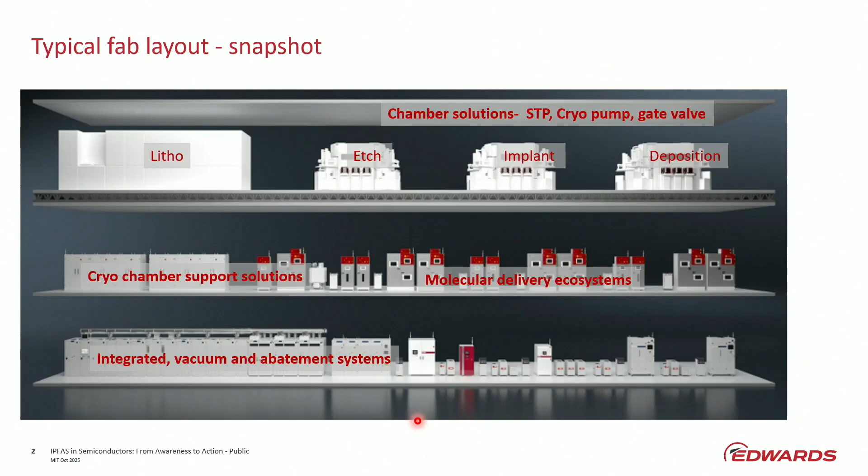Edwards, as you've just described very well, sits in the fab in various places, from the clean room with our turbomolecular pumps and chillers, to down in the sub-fab with our pumps and our abatement, but enough of the sales pitch. So what are we going to do today? I'll spend a bit of time on awareness. That's my role in life.

What are PFAS? This is very much aimed at a general audience. So none of what's going to be discussed here is technically challenging and won't go into substantial depth, but it is relatively broad ranging. So what are PFAS? Key environmental parameters and health impacts. Some of the regulatory frameworks. I was just being asked what's going to be the driver. Is it going to be public outcry or regulator? And the answer to that one, well, depends where you are.

The industry response. The industry often tries to get ahead of things by doing things voluntarily before activities are imposed on it. And how that industry response has actually been manifested in some health data. Then analysis. I'll briefly touch on analysis. The conclusion to the analytical section is basically you can't do all the PFAS with any one technique. There's a lot of work to be done on analysis and waste treatment. The two are intimately tied because if you can't measure something, you can't work out whether you're actually successfully treating it.

Then the studies on our own sites, water and wastewater. Some abatement characteristics. We've been looking at passing PFCs through our abatement. We've been looking to try to mimic chambers and passing byproducts from chambers into our abatement. And then some deposits that we found on pumps that have been returned to us from fabs themselves. So these are deposits from essentially real high volume manufacturing situations.

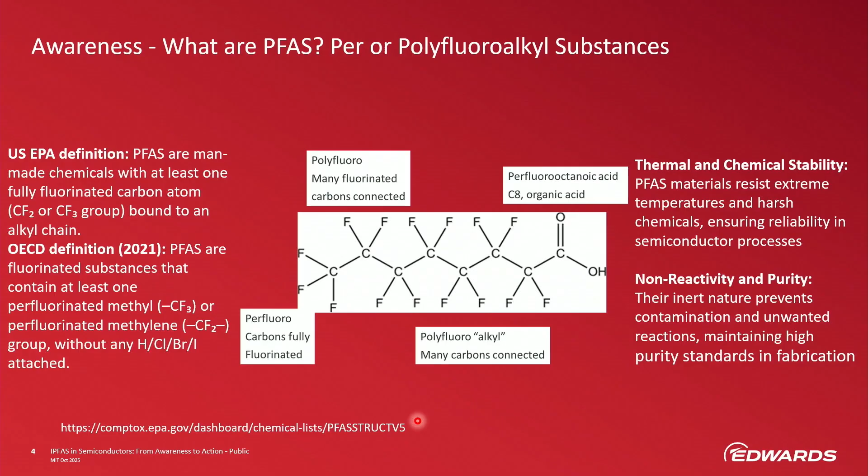As far as the fab is concerned, these are used in photolithography and photoresists, in etch and deposition processes. It depends how broad you want to go on what's a PFAS and what isn't, but in etch and deposition processes, some of the gases used may not be classified as PFAS. In equipment components, I've already mentioned PTFE, PVDF, PFA, Viton, Kalrez, materials like that. Heat transfer fluids: many of the heat transfer fluids are PFAS and need to be PFAS in order to keep the chillers the size that they are. We're moving over, because of various regulations, to different materials, different gases, but they can often represent different challenges.

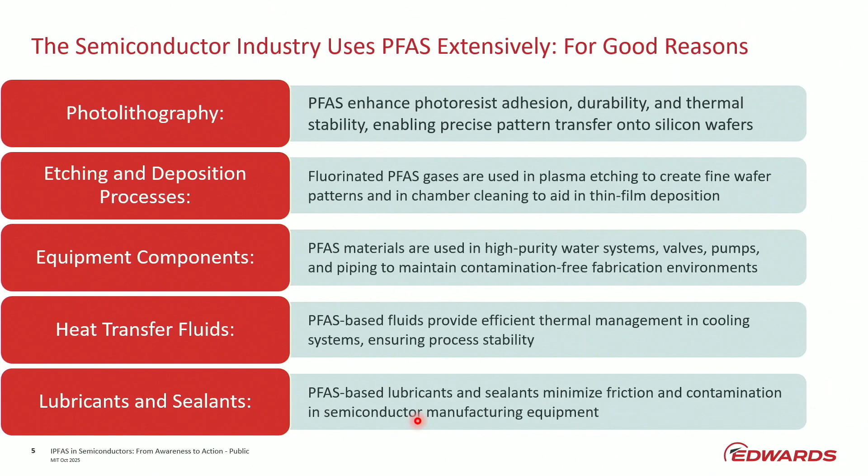And then lubricants and sealants. Our own pumps contain a perfluoroether, and certainly we use sealants that are PFAS at the moment, but we use them primarily because of the aggressive environment in which we're operating. Various parameters that are used to study the impact in the environment include things like persistence in water, persistence in the body, whether it's mobile, whether it is toxic, whether it's bioaccumulative.

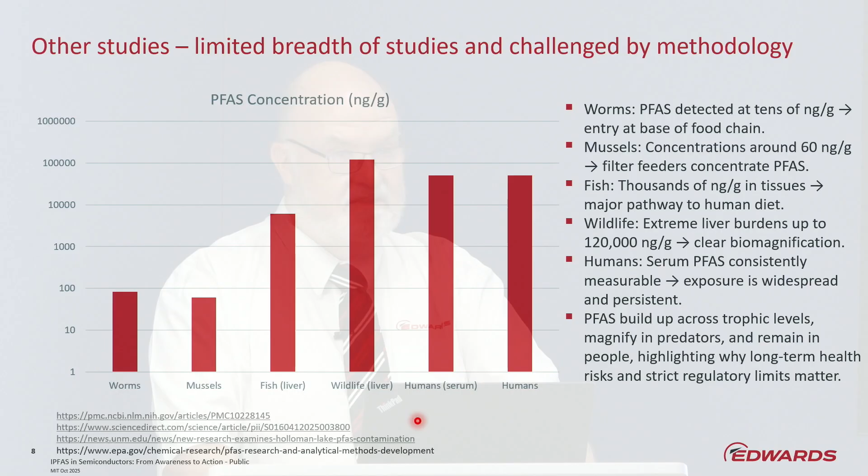So one example of bioaccumulation. If a material ends up in a plant and then moves into an animal, and that animal is eaten by another animal, and the PFAS is accumulated through that chain, that's called biomagnification. This is just another study: from worms to mussels, various wildlife, different organs. Protein-rich organs, so the brain, the liver, etc., tend to be areas where some PFAS will concentrate. I'm going to come back to the human serum comment in a little while. It's a good measure; there have been lots of studies on how that has changed over the years. The importance here is that predators will generally be eating species that are themselves contaminated, and it's a different route to mobility.

The effects. What I would stress here is, although this is a relatively large set of studies, and the greater list of references is rather more extensive, this is still a relatively small number. This work is ongoing, it's very early, and the analytical challenges that I'll probably come on to occur throughout all of these types of studies. Immune suppression, endocrine problems, liver challenges, thyroid and reproductive issues have been studied. They are of statistical significance within the study, but how do you then try to correlate with the presence of PFAS if the analysis of PFAS is still at a relatively early stage?

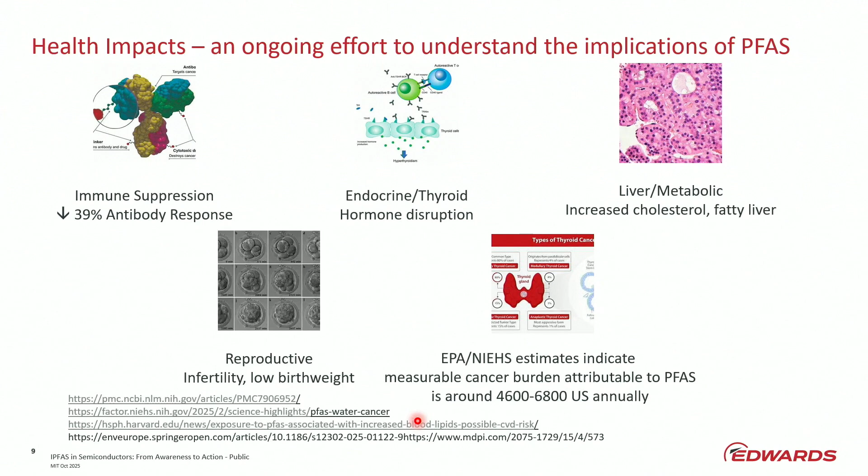So we all drink drinking water. So as this narrows, we're beginning to focus now on high-risk PFAS. And certainly the risk assessments, the methodologies used, are going to become increasingly important as we move forward. It's all about really what matters, but I'm not entirely sure that we're well versed in what matters yet.

Key considerations for the policymakers. I've mentioned persistence, bioaccumulation, toxicity, and mobility, etc. What scope are we going to use? Europe's got its 5,000. If they change to the revised OECD limit, then that will go up several orders of magnitude. US EPA currently 15,000, 20,000. The regulatory frameworks really do vary around the world, and that's a bit of a problem. There needs to be a significant degree of harmonisation. Stockholm Convention helps, but the Stockholm Convention is usually where things end up relatively gradually rather than broader policy.

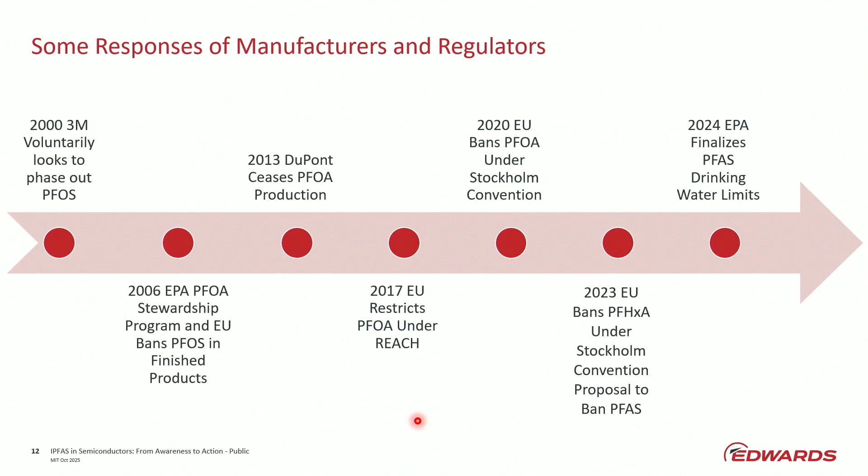And there's certainly a recommendation from the various medical institutions with regards to what you do and what levels are the action points. At less than 2 nanograms per mil, now you'll notice I've suddenly jumped to nanograms per mil, I'm going to be talking about nanograms per litre in a while, no action is needed. Follow standard healthcare rules. 2 to 20, we ought to be looking where they're getting exposed, and that's especially true if we're talking about pregnant ladies. And at greater than 20, there's really urgent action needed. We should be looking for signs and symptoms of problems in the thyroid, in the kidneys, testicular cancer, colitis, etc.

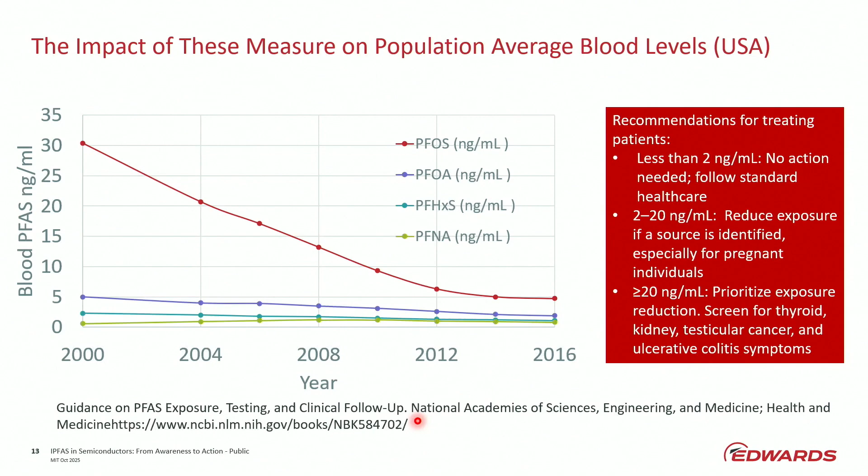Should I be concerned? I've certainly attended quite a few conferences recently where it seems to be very in vogue to send your blood off for PFAS analysis, and folks will present it. Is it a good thing? I think awareness is a good thing. If it's just fashion, I suspect that's not the case.

On the analysis side, I mentioned US EPA method 1633. LC tandem mass spec. It's certainly the method we've been using, not 1633. We've been essentially looking at a derived version of the older 537 with a rather broader range of standards, but nonetheless, that's certainly the method we've been using for our wastewater.

Air and volatiles, OTM 45 and 50, derived essentially from semi-volatile methods. Blindingly expensive to get done. Would love to get it done within the projects that I tend to be active in, rather more difficult to justify. Total oxidizable precursors, and then the various other methods mentioned here.

A good reference for review. I've listed most of the references, and the slide deck will be available afterwards for folks. So a nice review. It also then follows through to various other reviews. But the bottom line is 40, 50, 60 standards are on 1633, 5,000, 10,000 different species, 200 within TRI. There are some big gaps.

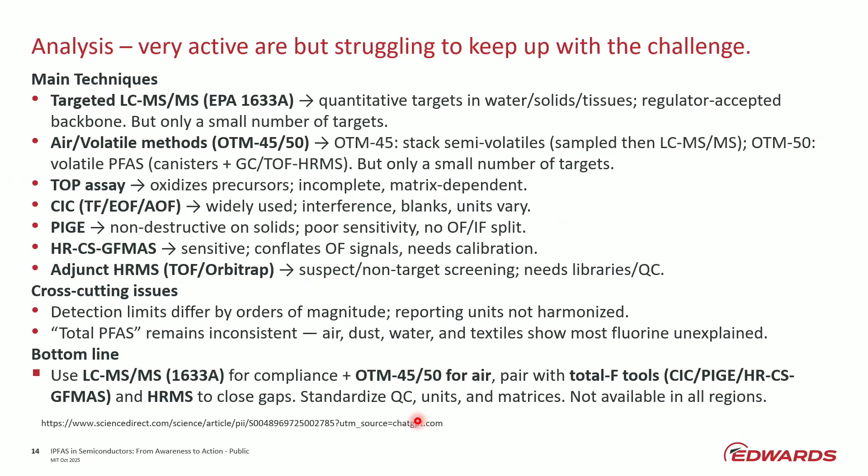In waste treatment, generally speaking, the gold standard seems to be treated as hazardous waste. So high temperature incineration, whether it's 1100, 1200 or longer term train type methodologies, you gradually increase the temperature of the material. At the moment, high temperature incineration seems to be the accepted method relatively globally.

In wastewater, granular activated carbon, ion exchange, reverse osmosis, all methods that are used, but as soon as you start getting very large volumes, you're going to start accruing substantial costs. A way of treating is supercritical water oxidation, familiarity with this from 25 years ago when it was proposed and used for chemical weapons treatment. They had challenges with regards to corrosion of their vessels. They also had scaling challenges. Neutralization in SCWO was highly effective, but it certainly had its barriers before it became implemented.

Electrochemical oxidation, as an electrochemist, I worry about this because it's surface area driven, it's diffusion driven. Can you get down to very low levels? That worries me. I've studied electro-oxidation for various contaminants quite a few years ago, and it can be effective, but can you get down to a nanogram per litre? Probably not without adsorption concentration technologies.

Liquid chemical concentrates, basically off-site hazardous combustion. We're back to combustion. Can you absorb and combust? On the gas side of things, thermal oxidizers at the right temperature. Well, I'm hoping I'm going to demonstrate that's probably the case today. The challenges are verifying the DRE, and certainly the data I'm going to show you today will demonstrate that we've certainly had difficulties maintaining any sort of carbon-fluorine mass balance.

So moving forward, the capture technology then needs to treat, you're always going to get secondary wastes. How do you treat your secondary wastes? So if residuals are there, do they get destroyed there? Do they get managed somewhere else? Combustion, okay. Landfill is accepted, but there are lots and lots of caveats with regards to landfill. How do you ensure there aren't any leachates? If there are leachates, how do you manage them? If there's off-gases, how do you manage them? We're back to the secondary waste challenge.

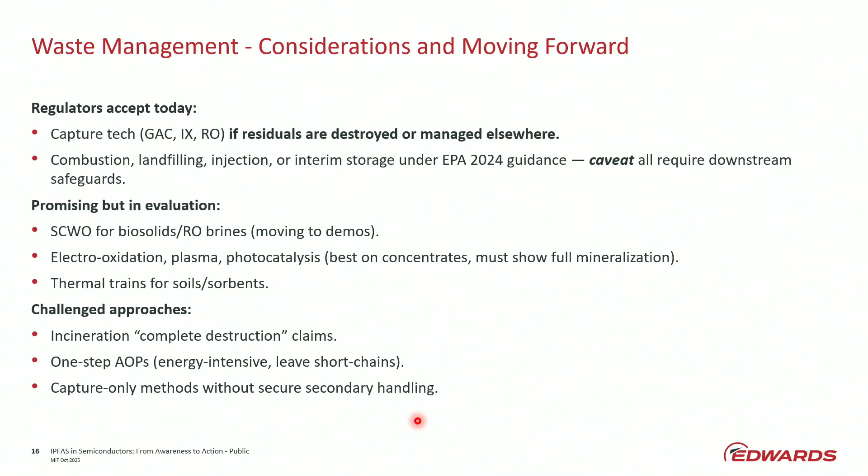So, what are the worries? The worries are, and certainly there have been reports in the media, incomplete destruction, or does incineration offer a complete destruction? Extensive studies going on in a relatively limited number of sites, that will have to continue. And then capture-only methods, what are you going to do with the waste? We're sort of heading towards the secondary challenges that we also have, say, in the nuclear industry. What do you do with a PFAS-laden waste? Probably incinerated at the moment. So that's the awareness side.

If I move on to our own testing, these are the compounds that we've been analysing for in water. I need to stress all of our work to date has been done in water.

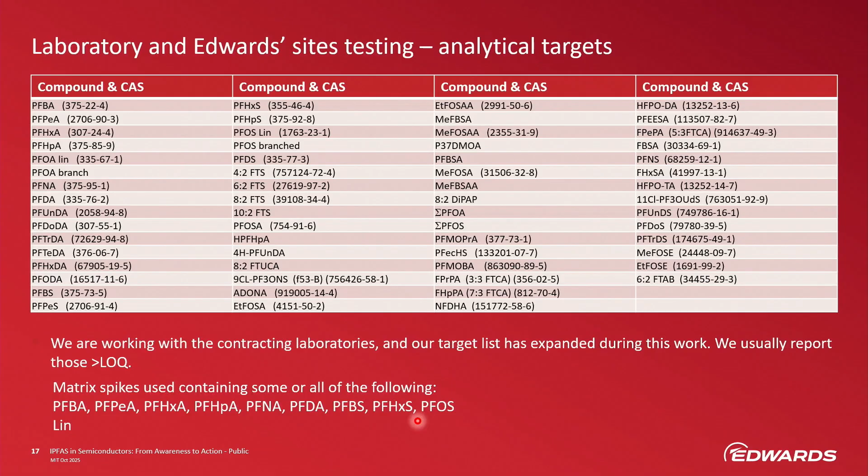Not all of these analytes have been targeted in every single sample. We have 2 labs we use for 3 different types of analysis. What we refer to as a high limit of detection at about 100 nanograms per litre, medium limit of detection at about 20, and low limit of detection down at about 1.

I've plotted for the various species the limits of detection, and there is some variation there, but essentially this is what we will refer to as high, medium, and low limit of detection analysis. And some of the samples I'll be showing you are definitely in the low, and some of the samples I'll be showing you needed dilution to fit in the high.

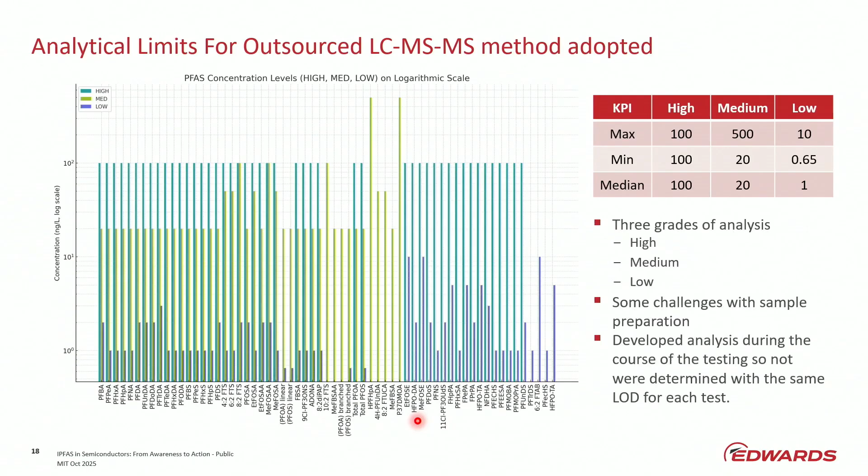A bit of a recap. Back 2 years ago, almost 2 years ago, I presented at SESHA. Why do we use PFAS? The bottom O-ring that had disappeared was nitrile in 20% fluorine for not very long. The Kalrez FFKM O-ring survived. Where are PFAS used? In all sorts of places, from pipes and tubing to tape to insulators to liners and diaphragms.

Within our own service technology centres, how do we manage PFAS? Well, O-rings are sent to hazardous waste incineration. The oil is incinerated or recycled, and about 69% of our PFAS waste in total was from oil, with 17% of it off to hazardous waste incineration.

We did some testing at a fab in Europe where we were experiencing a liquid in the pump exhaust. It was causing problems with the service interval, and we were brought in to look at essentially what's the problem. After a lot of toing and froing, we identified it was a perfluoroether, and our first port of call was it must be the oil out the pump. But the oil level in the pump wasn't changing.

So this was on a Bosch process, and actually it was coming from the process. A significant quantity of liquid was coming from the process. But back in 2017, when we were looking at this particular example, this was an MTBF problem. This wasn't a PFAS problem. It wasn't even a greenhouse gas problem. So we urged the operator to put heat trace on their pipes. The material disappeared into the abatement and essentially disappeared.

We also, a couple of years ago, did some testing whilst we were looking for the limits of HF removal from waste gases in our abatement systems. We heavily overloaded one of the abatement systems with C₃F₈ in order to push the HF concentration up, to try to work out what the limiting performance was for HF, and we took the opportunity to look for PFAS. We thought, well, if we're going to see it anywhere, we'll see it when we're maloperating. At the 100 nanogram per litre limit that was imposed on us at that stage, we didn't see anything, everything below limit of detection. So that was the work leading up to SESHA in 2023.

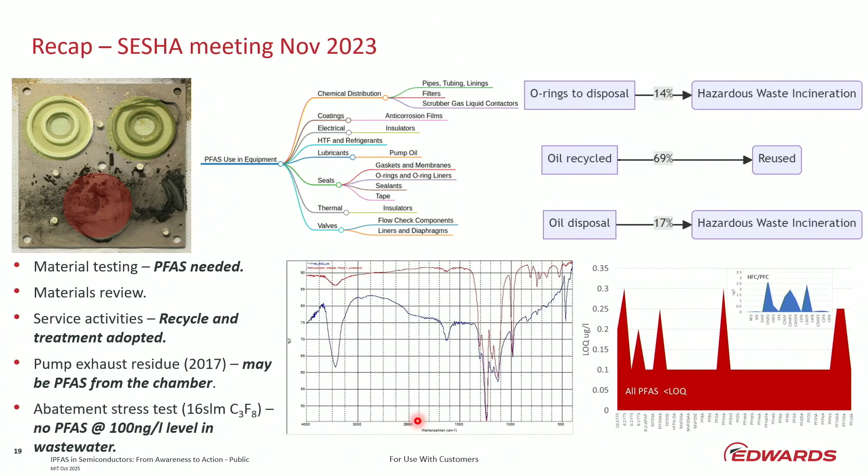On our UK site, this is a little bit simplistic. We have city water coming into a softening plant, chemicals coming into the softening plant, that feeds our labs. We have city water coming into a small recirculation loop, which is essentially our final test area. That test area involves heating certain PTFE components to quite high temperatures, so we were expecting some challenges here. We have a much smaller test area here, and then we've got a chilled water supply. Everything is neutralized before sent to outfall.

If I look at the levels of PFAS in our lab water, this is soft water results. So the red line is essentially the average of quite a few now soft water samples, so that you can see in the nanogram per litre level, we're getting the butyric, we're getting the pentyl up to about 12 nanograms per litre, and then gradually dropping down to, thankfully, very low levels, limit of detection for the longer chain, including the regulated PFOS and PFOA.

The grey represents variability, 95% confidence limit. The yellow represents our tap water, so the softening system's removing some PFAS to an extent. Might expect that. Ion exchange is used for removal of PFAS, and the green line's essentially the limit of detection of the species. All the others were below LOD. But what are we essentially saying? Our water's got PFAS in. If the results are in the grey zone, we can't tell the difference between our water and the results that we're getting.

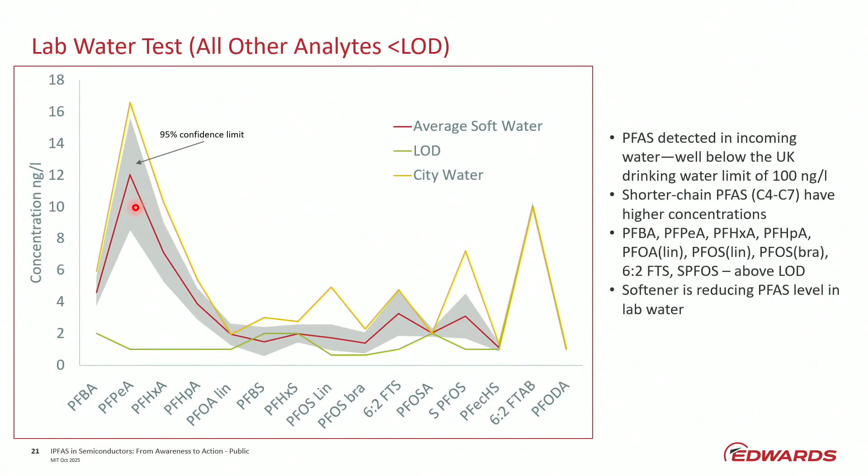Taking all that on board and redrawing that map, essentially we've got contaminated water moving throughout our system. But as we did suspect, there is PFAS at a higher level here, in the 20 to 70 nanogram sort of range. Noting that UK drinking water spec at the moment is 100 nanograms per litre. There's very few wastewater specs globally. So we're within drinking water specs, but that's essentially what we were expecting to see. And then to neutralisation and outfall, as I said, it's a small volume discharge before neutralisation. The major water through route is essentially through our lab.

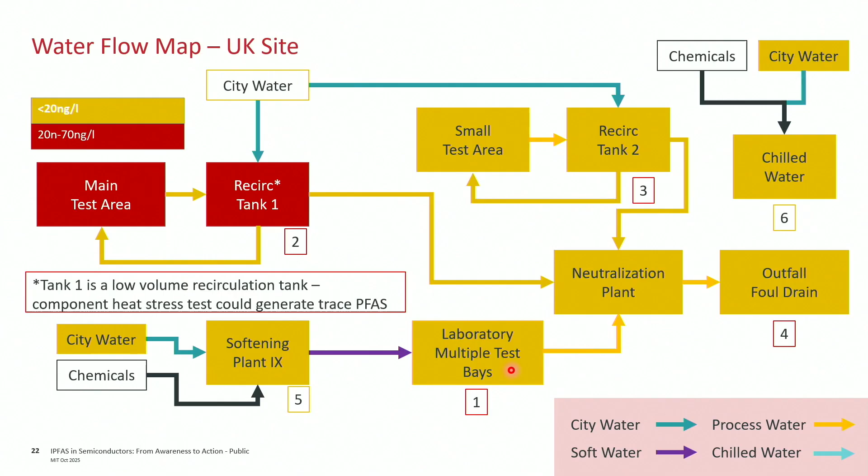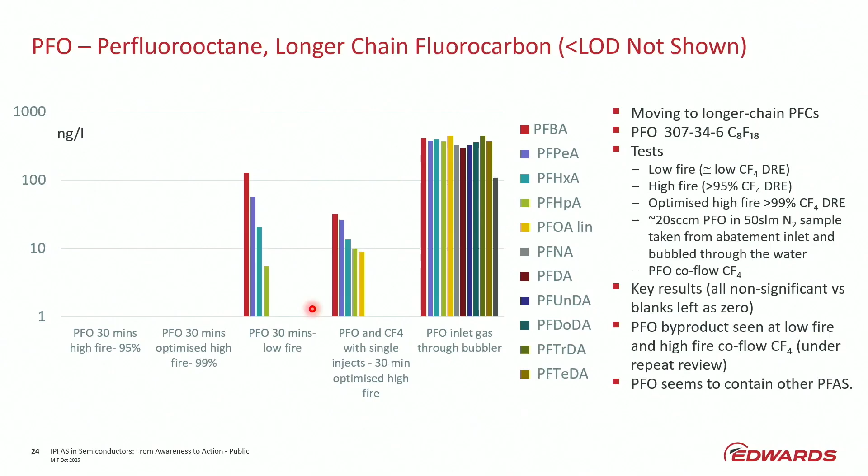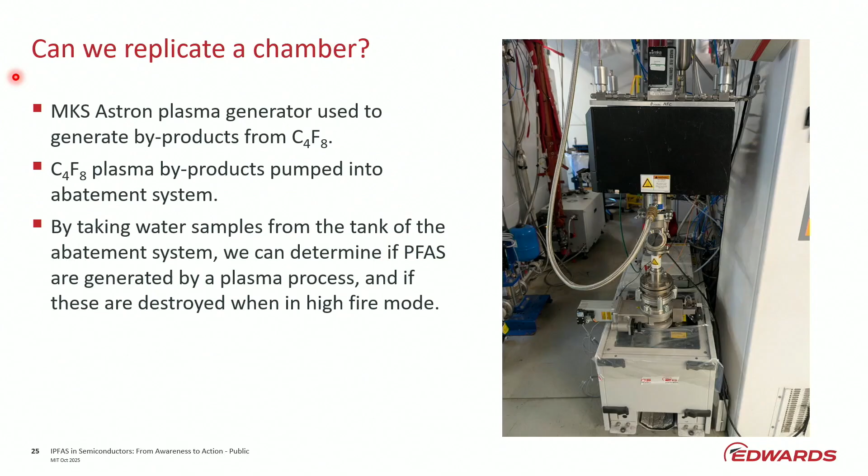Okay, that's great, but what about getting closer to a chamber? We don't have a chamber. So what we used was an MKS Astron ICP to generate byproducts from C₄F₈. The byproducts themselves were then pumped into an abatement system and water samples were taken. I'm going to show a few diagrams now, essentially the methods. So the Astron to a pump to an abatement, C₄F₈ and argon.

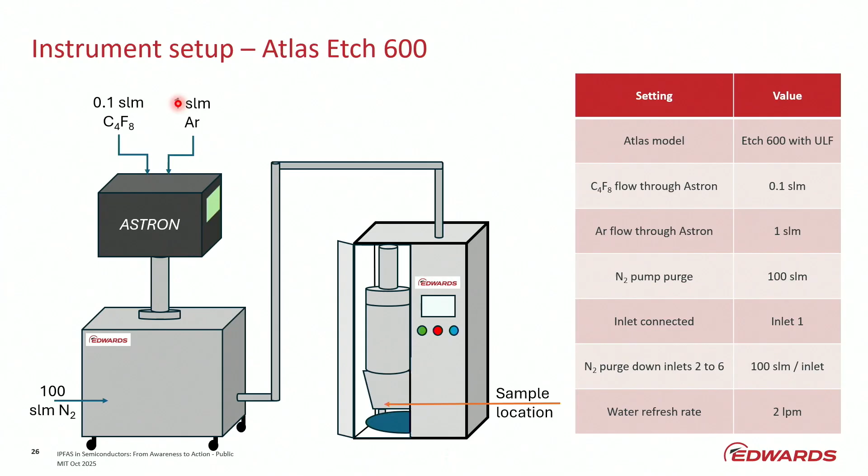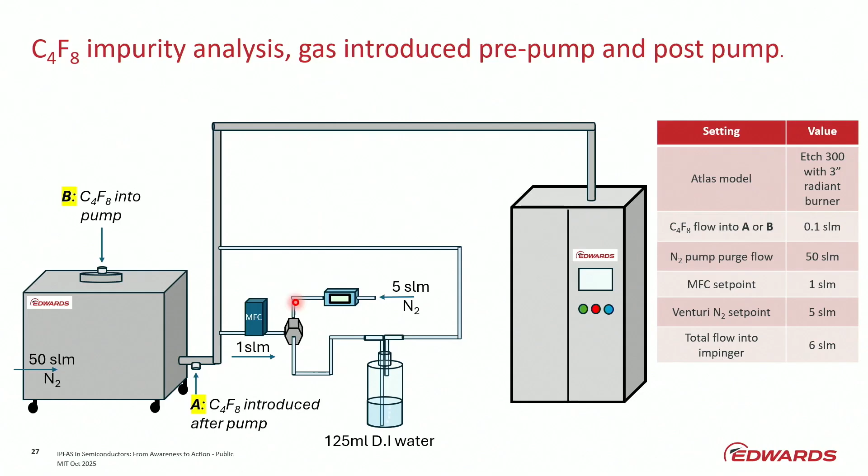C₄F₈ into the pump, C₄F₈ after the pump. Now, we wanted to try to distinguish between C₄F₈ that had been through an Astron or been through a pump, to make sure whether the C₄F₈ itself was contaminated. We have an impinger here. We have the abatement here. Most of the gas goes through the abatement, but some of the gas goes through the impinger, and DI water samples are collected.

And then to somewhat replicate OTM45 type methodology, although I will concede you don't usually have your 4 impingers on that, we had DI water, and made a decision to stick caustic in at the end, which was probably a good idea, to do another test. In an ideal world, most of the material would end up in impinger 1, little in impinger 2, very little in impinger 3; more than 10% in the wrong place is essentially a fail. We put the 1 molar in there anyway in case we just saw something, and we did.

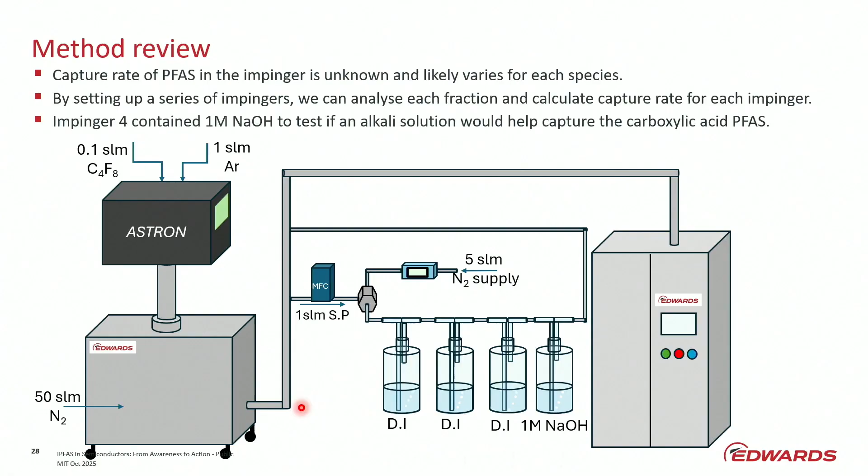Unfortunately, we'd contaminated our equipment. So when we switched to high fire mode and took a blank, essentially the blank and the high fire mode are pretty much the same. The snag we've got is we've ended up contaminating the kit. So experimental order, experimental method is really rather critical. And there's going to be a pointer here to how we might want to consider running equipment in future, or at least the question should get asked.

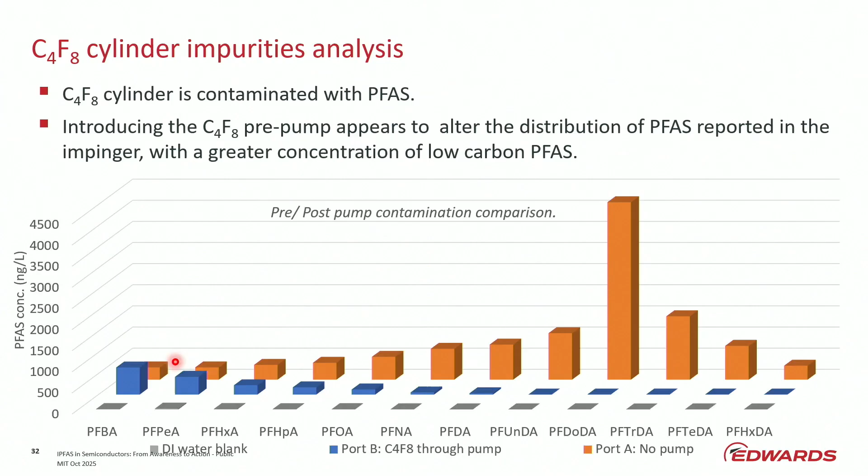I mentioned that we were looking at the C₄F₈ cylinder impurities, and that's exactly what we found. So C₄F₈ is contaminated with PFAS. If we introduce it pre-pump, we alter the distribution with a greater concentration of the low carbon PFAS. So whether it's before or after rather depends on exactly what we're up to, but that could be a contaminated pump. So again, we have contamination challenges.

Moving on to the pump, we ran an Astron plasma for about 30 minutes, turned it off, and 2-minute impinger samples were taken regularly over 5 hours, and it took rather a long time for the PFAS to drop back. If we were targeting a 10 nanograms per litre blank, it took rather a long time to get back to blank.

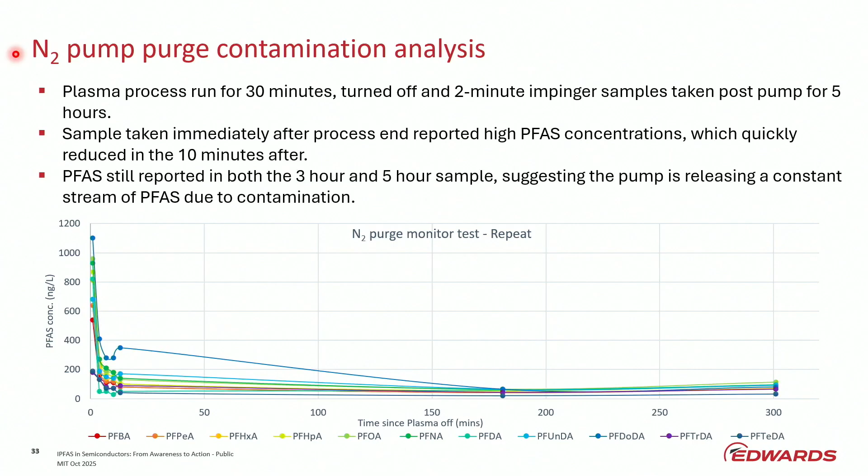Normally, if we were abating C₄F₈, we would have a PFC signal: if you're flowing C₄F₈, turn the PFC signal on, activate high energy mode. When the PFC is no longer flowing, wait a little while, then turn it off. We might need to at least ask the question, is that appropriate? The answer may be yes, the answer may be no, but the question needs to be posed. It does mean we can see very clearly here how difficult it is to maintain clean systems in order to do low limit of detection analysis.

If we clean the Astron using an argon oxygen clean, then we get exceptionally high levels of PFAS coming out. Introduction of oxygen in the plasma reported very high concentrations, likely formed from the reaction of the plasma with CF polymers in the pump. I'm going to come on to that. That's my last topic, CF polymers in the pump.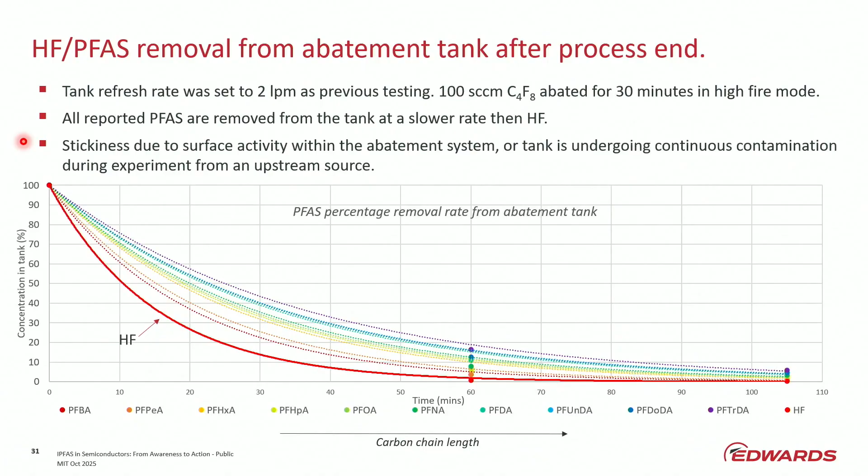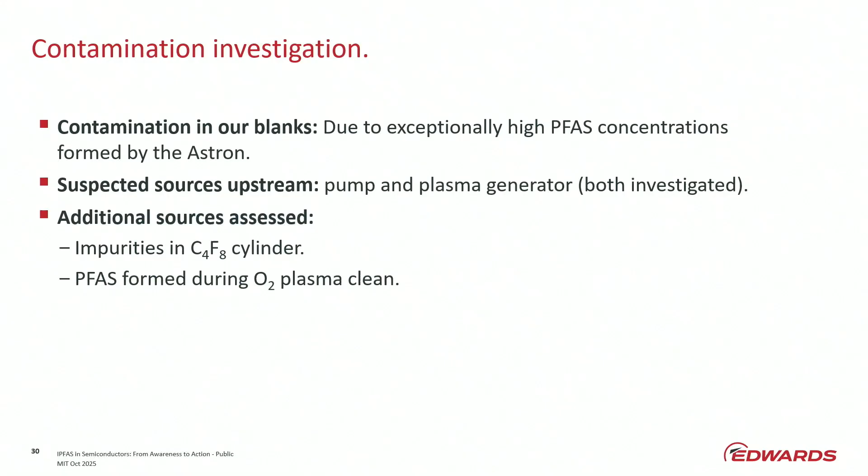And then, earlier on we'd mentioned that we'd set up the abatement system such that we weren't really getting back down to low levels of detection to determine whether we were getting good abatement. And if we were careful, then what we end up with is this situation. So we're almost back to 10 nanograms per litre. So what we can say here, at least within the limit of the analysis, we're doing a good job in destroying the PFAS that's coming out of that Astron.

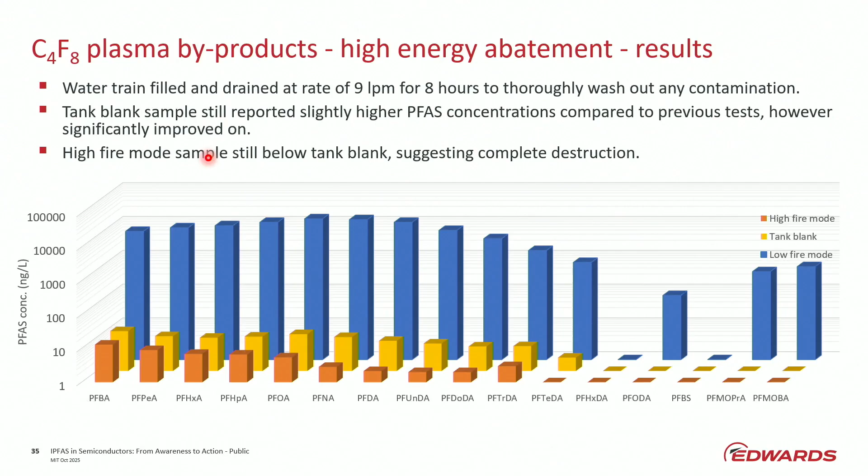Impinger tests. I mentioned we had an impinger in here. We've got a lot more data than this, but we don't have a lot more time, so I'll concentrate on that multiple impinger test. And what we saw was this. So impinger 1, impinger 2, impinger 3, caustic impinger. And what you can see is a gradual decrease generally in impinger 1, 2, and 3 for the shorter chain.

But as you move to some of the longer chain, perhaps that's not applying. Now we don't know exactly how much is being produced, so that's a bit difficult to tell. But in the caustic route, the shorter chain seems to be taken out rather well by the caustic. The longer chain, less so, probably expected from the chemistry.

If I look at total mass conversion, and we try to run the maths, making an assumption that everything's captured, which undoubtedly it isn't, then we've got roughly 2.7 mgs in 15 minutes from the impingers, but from C4F8 that would have been 13.4. Most of it, however, is converted to the PFCs, but not all of it. We're about 28% missing. So somewhere there's some CF floating around, probably heading into our pumps, but not being identified by the analytical techniques open to us at the moment.

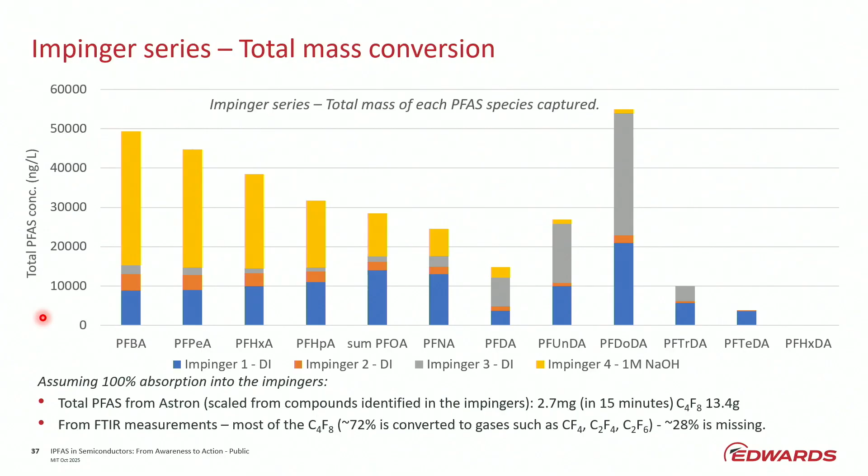So as of a couple of days ago, we can set up in such a way that we can, at least within our analytical limits, demonstrate from the Astron results that plasma byproduct PFAS is destroyed by the abatement if operated properly. We've also demonstrated a significant degree of contamination problems, as well as a CF balance problem.

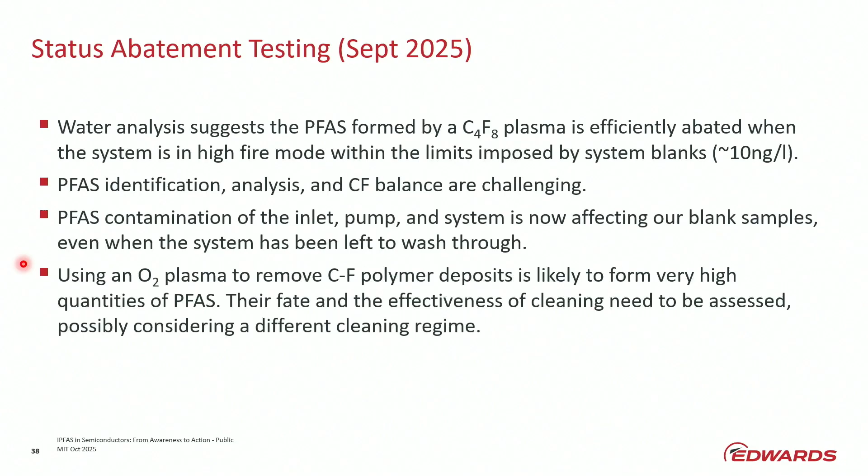The oxygen plasma was able to remove a substantial amount of carbon fluorine deposits from various places, including the pump. But we have yet to determine the effectiveness of that cleaning method. So we'll drive on, and sometime in the next 6 months, there'll be more to report on these topics. I said I'd talk about pumps.

We often get powdery deposits in our pumps. The photographs here: that's a subatmospheric CVD high aspect ratio gap fill process, it's this one. And this one's a high aspect ratio via etch process, this one.

What we saw from EDX was essentially pretty well 100% carbon fluorine deposit. In other words, the white deposit we have here is almost exclusively carbon fluorine. Slightly interesting, if we put it through a TGA, it largely all goes by about 240C, so it's obviously not Teflon, but an interesting point.

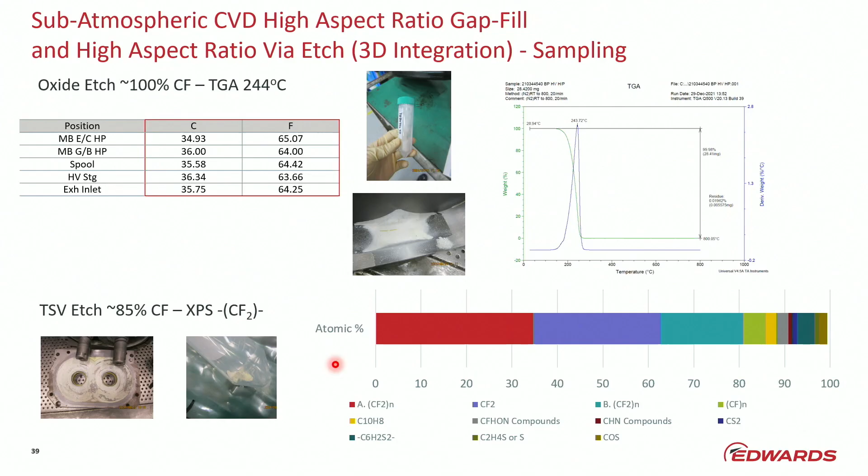More recently, we've been using XPS to try to determine some of the species, and some of the species have essentially been identified here. So we are getting CF2 polymers in these materials. But what we did was we then took some of the samples and sent them off for conventional solid PFAS analysis.

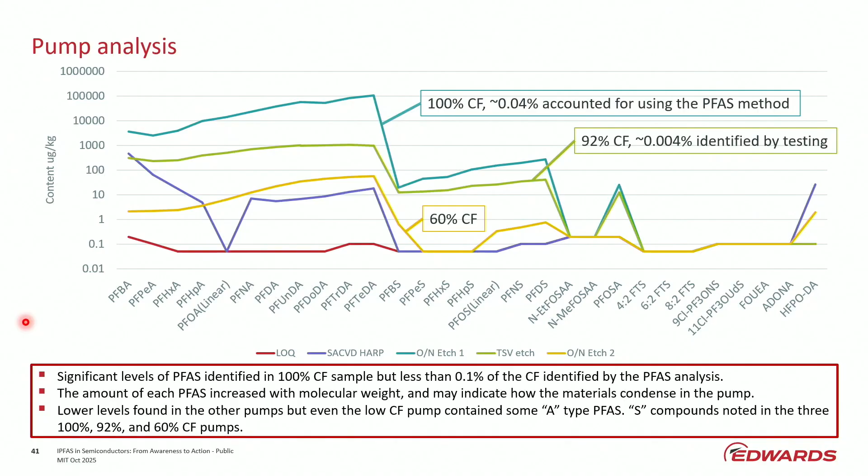Going on to operational controls. Got lots of sites. Some of them are service technology centers, some of them are product companies. The pumps that we've just been talking about have been sent to a service technology center. The service technology centers are essentially designed to handle hazardous materials coming to them.

So it's no great surprise that they have the techniques in place in order to manage hazardous deposits, to manage chemicals like PFAS. Everything essentially ends up in hazardous incineration. Employees are essentially protected not only by engineering but by the appropriate PPE.

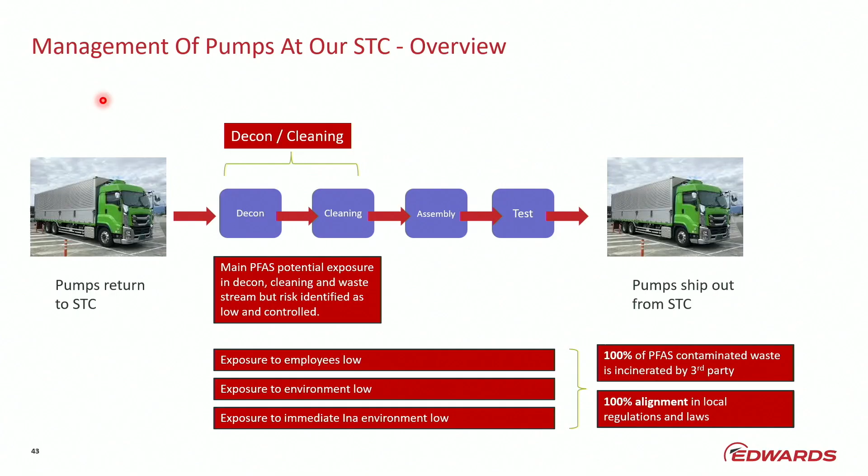As far as the company strategy is concerned, we're now in a phase of needing to remove PFAS where we can. So it's identification, where we're using it. That has proved an extraordinarily painful activity over the past couple of years. A lot of our supply chain will struggle to identify where they're using it. Justify its use. Do we need to use it?

I mentioned historically we've all been lazy. We've used it where we don't need to. Now we have to justify. A VP's got to sign off if we're going to use it. Reduce where we can, eliminate where we should.

And our current mission is to drive to a 2030 target where any new product after 2030 should not contain PFAS. That, I think, is an extremely tall order. But if you don't aim high, then you probably end up low anyway. So I think it's well worthwhile having the target.

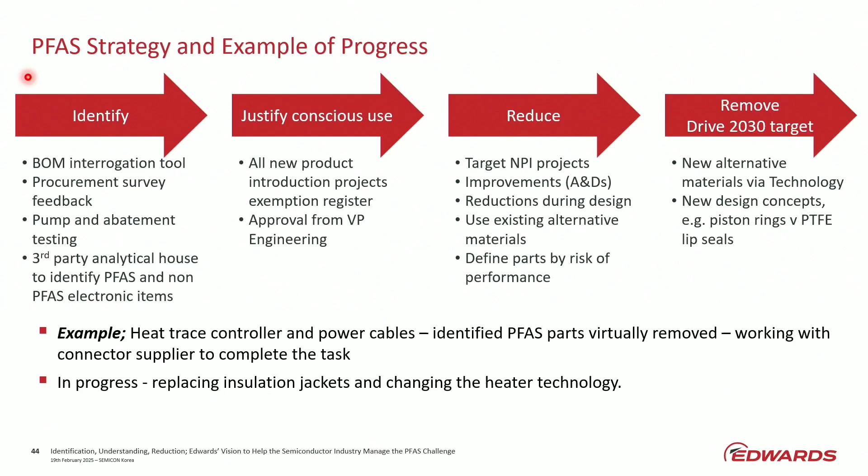Education, I've mentioned my job is awareness. I think these guys are brilliant. This was one of our product companies in Korea who basically got their suppliers in. They have a PFAS task force. That PFAS task force then educated their suppliers on what PFAS were. They're also educating their employees.

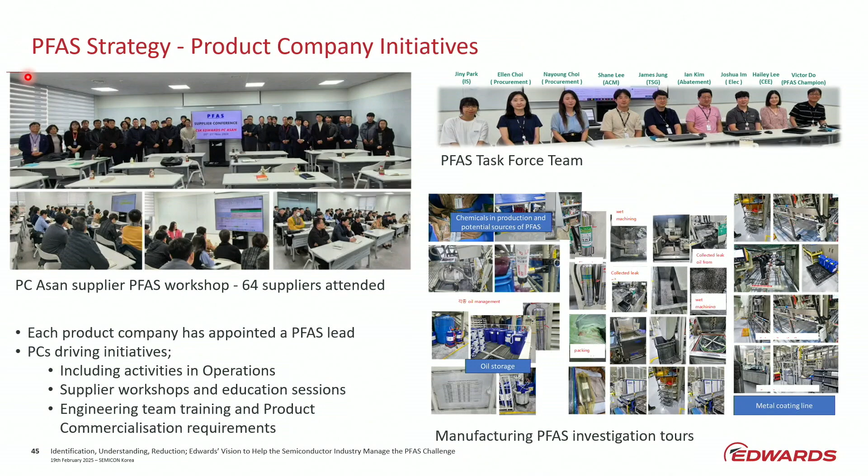There are tours of their facilities to identify where PFAS are coming in, where PFAS are being used, where PFAS is being released. This is essentially where the regulations are going. You're going to have to do it. So identification, where you have to use it, and then management is really going to be desperately important.

So in summary, I think we've got there in good time. Basically, PFAS is everywhere in fabs. It's critical in etch, deposition and coatings, valves and pumps. The same traits that make PFAS useful also cause some problems in persistence, in bioaccumulation, toxicity and mobility. Health risks are real. Lots more research is going to be required.

Regulators are tightening fast and inconsistently. But we have to live within regulations. Analysis and waste, there is a lag in technology. Only a fraction of the PFAS can be measured by speciation. And if you can't measure, then you can't treat.

And industry must act, well, everyone must act: identify where you have to, remove it where you don't have to, design safer alternatives and manage waste to prevent environmental release.

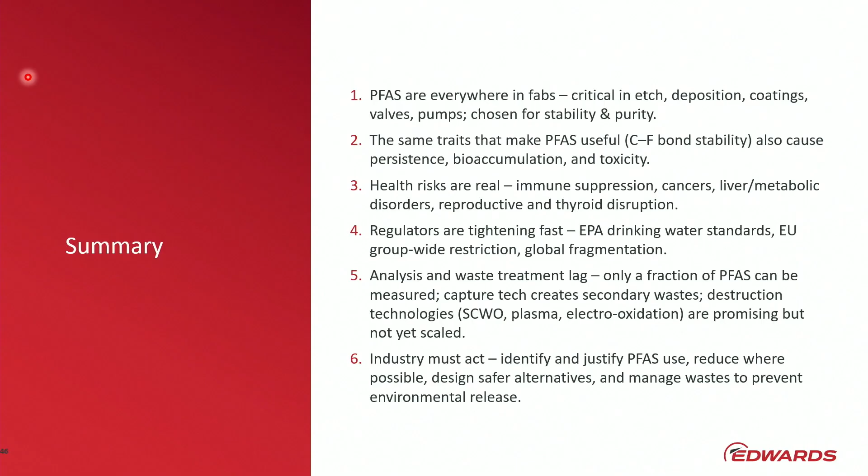Thank you very much. That was wonderful.

We had talked right before about the difference between, if you're trying to get rid of PFAS, would regulations help more, or would it help more if there was public outcry? And you already answered that, saying it depends on the region, but you want to say a little bit more about that? Yes, what I'll do is I'll go by example. In Japan, there have been concerned citizens groups wandering around, measuring river water, and then putting the results into the press. And has every industry jumped? So that's a situation where actually concerned citizens are doing stuff.

In other regions, it's much more done by the regulator, so it's hit and miss. Some folks will have different priorities. It isn't a now problem for me. It isn't like putting food on my table. Although I perhaps shouldn't say that. But it isn't an urgent problem for most people, and therefore it will depend on region.